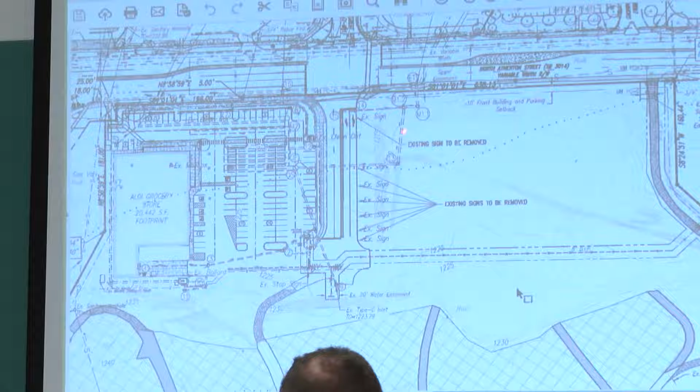There was a master plan done at that time that was approved, including 3,000 square foot retail buildings anticipated to be more than likely restaurants, and a 16,000 square foot two-story building anticipated to be an office bank building. That was the master plan.

So if we jump to the next sheet, you can see the proposed project here. The bank we are proposing would be this building right here—it's 14,800-some square feet, 5,000 square feet on the bottom and 9,000 on the top. That's because the footprint of the building is here, but the second floor would be over top of the proposed drive-through lanes, as most banks have. As you can see, the site would have 54 parking stalls installed with this phase.

I say this phase because we are showing future buildings anticipated here and here. Those are not slated for construction at this time. They're shifted around a little bit from the master plan, and we wanted to represent what this whole thing in its entirety would look like.

The development would also include a retaining wall around the perimeter of the site, similar to the first phase where Aldi's is—a two-tiered wall with landscaping between the levels and uplighting. The sidewalk would connect the interior of the site down to Atherton Street, going around this area. There would also be a set of steps coming down from this commercial area, similar to the other side—same wall construction, amenities, and plants around the perimeter, with a tension wire guide rail system for cars and people around the top.

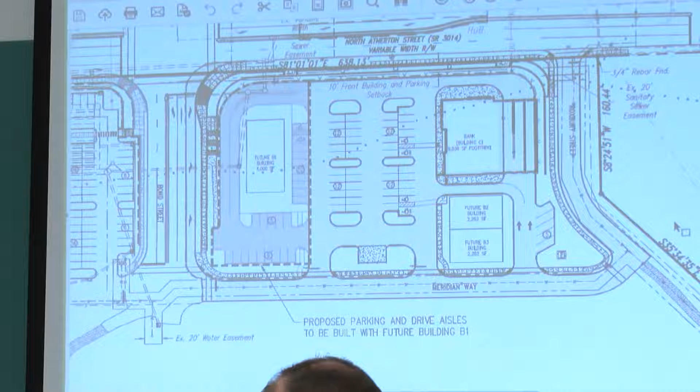Part of this development would also include some roadway improvements. The traffic impact study done for the site indicated the need for a right turn lane on Atherton Street to Woody Crest, right here. An HOP has been submitted to PennDOT for that; it's being reviewed, with one or two minor things we're working through. We're working with the property owners on the easements—that agreement has been reviewed and generally accepted, so that would be the last step for that HOP to be put in place.

That HOP also includes a lengthening of the left turn lane on Atherton Street into the site and the addition of one more lane right here. Those improvements are based on the full build out of this site, so those numbers used for the traffic impact study were based on the master plan you had seen 2 years ago for the entire site. That's the anticipation - there shouldn't be any more improvements on Atherton for this project.

Now the site also includes a right in, right out, which would be this road right here. These are all internal streets. There's a connector street right here, so there would be a loop around this entire section of the project. So access - this would be right in, right out, this would be full intersection with improved lighting timing system.

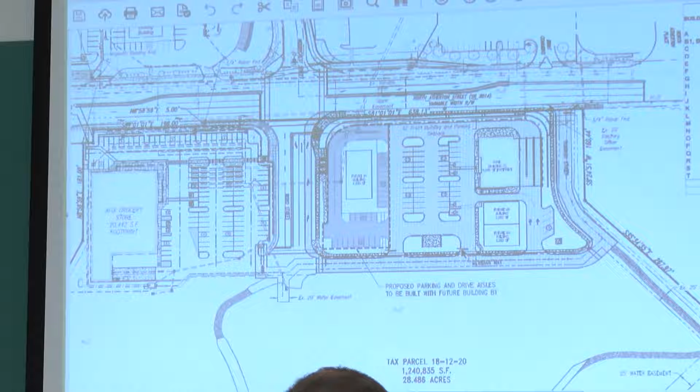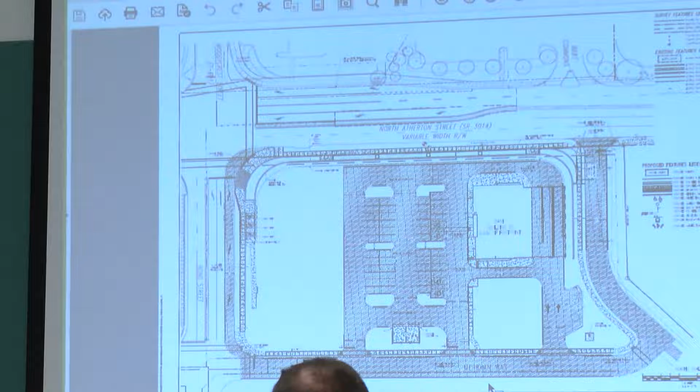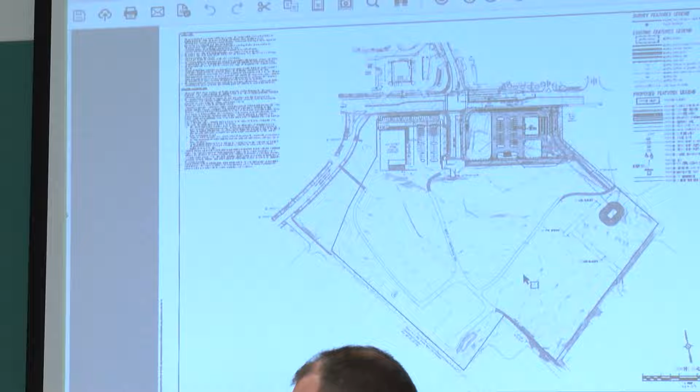Looking back at the overall site, there is a stormwater basin. It's kind of way back here in the low corner of the site. It's designed for stormwater to get collected on the site, it gets back here, and then everything leaves the site through this pipe under Atherton Street - it goes back there and is managed, and then comes back out. When this project evolves and gets bigger, more of this whole area will be a detention basin, so that little hole you see is the start of what's going to be the rest of that site.

The site includes lighting on the site. We have an area for refuse and recycling pickup - it's centralized, one location. The anticipation is everybody would use that one spot, the bank, in the future development, so trucks come in, pick up and get out pretty quickly. As far as other utilities, sanitary leaves the site on Atherton Street, tying in here. Water comes through the site at that same location, fairly innocuous to this project.

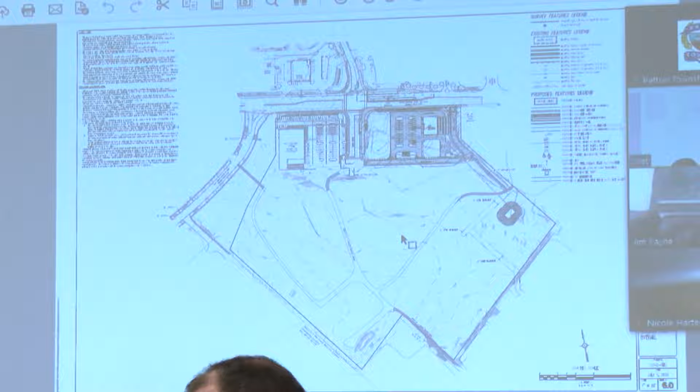So the bank itself will have 3 drive-through lanes. It will have an ATM - I believe the ATM is on this lane here, and then a drawer and pneumatic service to these 2 lanes right here. Like I said, it will be a 2-story building.

Let me show the rendering, Alex. We do have a picture of what it's anticipated to look like. Can I interrupt before you go there? Sure, 2 quick questions.

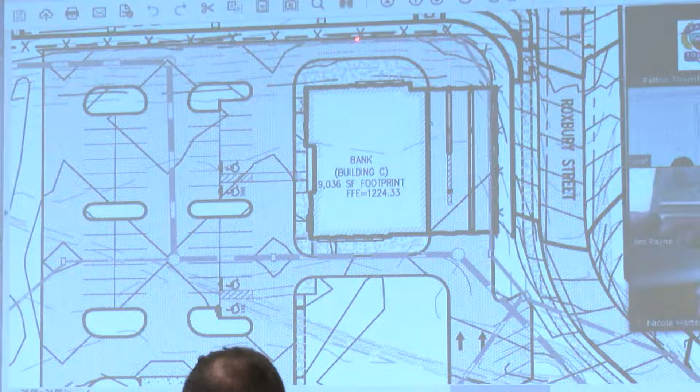So the drive-through traffic will then, once you go through the drive-through, right there, okay, straight out. It'll loop around and can come straight out - there's an exit right here.

And then what about pedestrian traffic from that area - let's say we want to head in the direction of campus, how does one do that? So if you're in the bank, you can sidewalk to here and out. You can sidewalk to here and either down the steps or down the sidewalk. Both of these sidewalks are ADA compliant, the roads are ADA compliant, or you could use the steps. So this gets you to - you do have to loop around here. This corner is about 6 or 7 feet high, so there's no connection directly from here to this corner. You do have to loop around the bank.

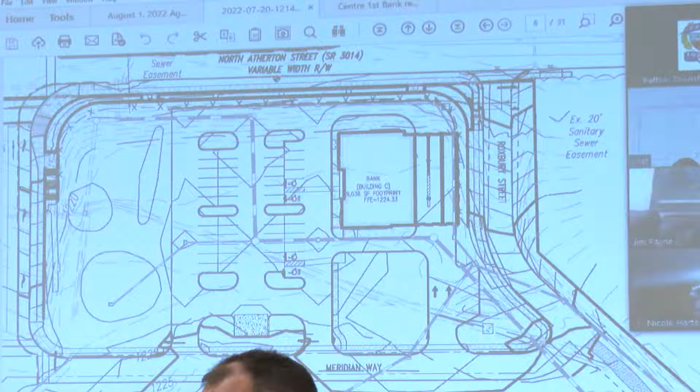Yeah, okay Brian, thank you.

So here's a rendering of the bank, this is what it's anticipated to look like - a lot of glass in the front, 2 stories, with a mixture of stone and/or brick and metal. They liked the look of this building, so they moved it forward. They thought the presence on the site would be good, this would be a good first building for this phase.

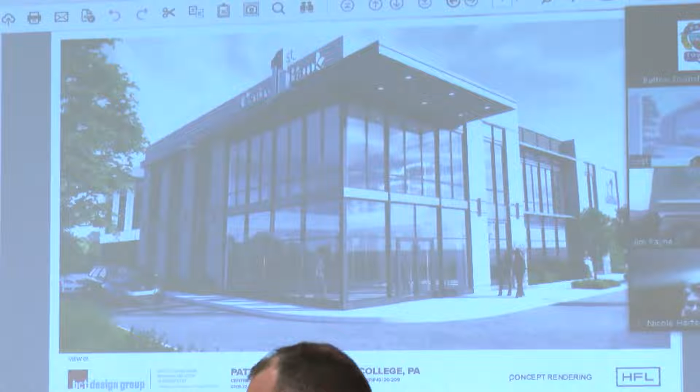We're showing the signage up there. We understand the signage will have to be permitted appropriately - I'll call that a wish sign, we haven't gotten to that part yet, so I'll let you know. Yeah, it's not permitted, but that looks good, that's what they want to see there. So we understand that.

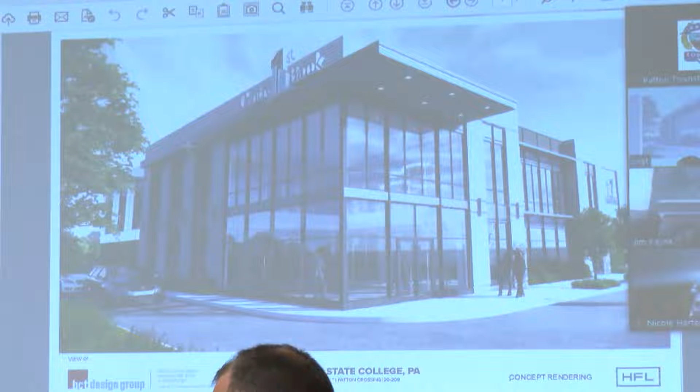I think there are a couple outstanding items yet. There was a question on location of some fire hydrants - we can certainly work through that. There was also a question on the bike path that currently connects from Park Forest Avenue and loops down here. Our intention at this point would be to tie it into this street to continue that connection to Atherton Street. That bike path will evolve as the site develops - the master plan had shown where it starts and ends. I'm sure as we go forward we can talk about the development and the connection to Atherton Street. I don't know, is there anything else we needed to talk about, Alex?

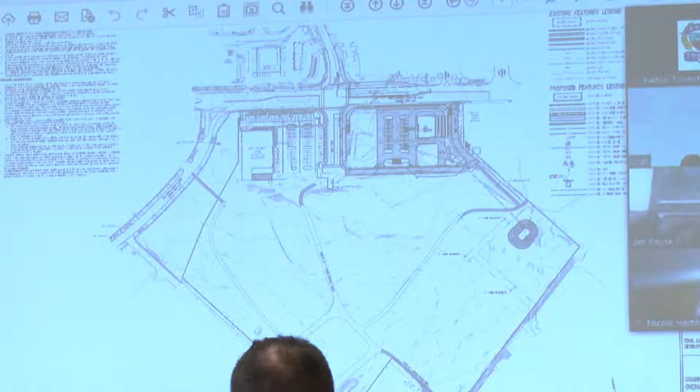Just a question - where was the area where people go to use their cards to get into the bank? Was that on the back side, on that first row? I believe the ATM was in this location right here.

So then people walk all the way around to get back to their car? No, it's a drive-through. Oh, it's a drive-through - so these lanes here are to use the ATM? These are drive-through lanes, it will be a drive-through ATM.

Yes, and my understanding is that the location of those ATMs now, they're really pushing to get them in the building, as opposed to putting it out here away from the building. Keeping the machine itself in the building is a big security thing.

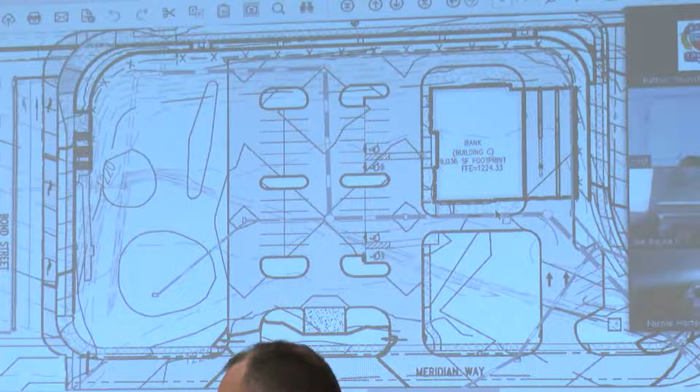And those traffic improvements that have been submitted to PennDOT, those would happen before the entire Phase 2 would be completed, correct? That's correct. Okay, thank you.

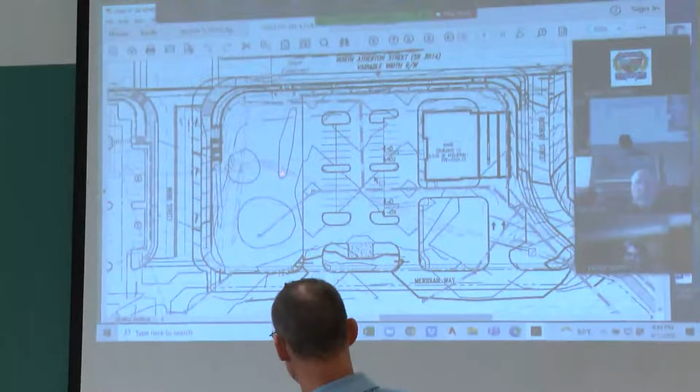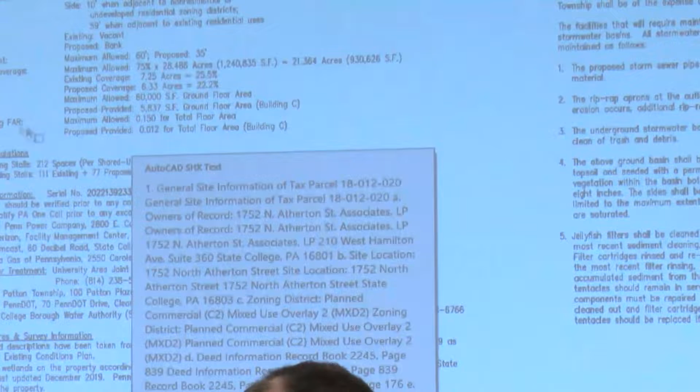Can we talk about the parking that you and I talked about earlier today? So the plan that we had submitted, our intention was to show an overall anticipated build-out for this area, which included this building and this building here, which showed a parking shortfall of 30 spaces. That was only intended so everybody understood that because we moved these buildings around a little bit, we'll be coming back when those buildings come in, when we know what they are and what the areas are, and that'll be revisited.

But the required parking for the two businesses on site now, the bank and Aldi, requires I believe 136 parking spaces, and there are 188 parking spaces available with this plan. So there will actually be more spaces there, with the anticipation that the excess would be eaten up when those buildings come in. And what Alex is talking about is our plan note wasn't quite clear on that, so I wanted to clarify that, and we can certainly update the note.

Also in the agenda, it states that zoning permits will only be required for the rest of the phase, so that won't be the case - we're going to see more land development plans. Yes, so I wanted to reiterate that.

Thanks. How about bicycle parking? Any bicycle parking at Aldi's or the bank? Aldi has bicycle parking, we did show some there. We did not show any at the bank. I'm sure we could find some spot for bicycle parking there. Yes, we did not - we need to add that.

Now, this would not be under anything we talked about last month, because this was approved already, so any future adjustments we make for bike parking discussed last month would not pertain to this instance, correct? Correct, it's actually not even approved by the Board of Supervisors yet. So even if it would be approved, it would not pertain to this because this was approved well before we began this discussion.

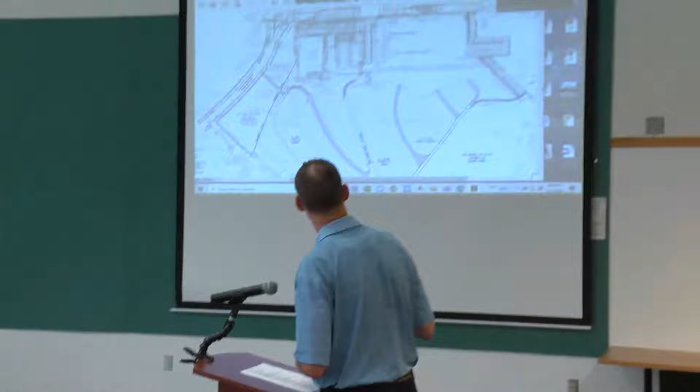Starting where I have my cursor, that's where the road, Roxbury Lane, will be built, right here. So the bicycle path will terminate there, and then it'll just be a roadway. And there's nothing we can do to provide for cycling safety at that point? I guess it seems kind of scary. There's nothing really to connect to at Atherton Street, that's the problem.

That eventually, when we were talking about this with the master plan way back when, the property manager was talking about developing that parcel more or less simultaneously with this, and we were going to have a vehicle connection at that point between the two properties, so we were going to extend the bicycle path into there with the hopes that would get people over to Martin Street, which is a much better place to put bicycles than on Atherton Street. So until the Temple property develops, we won't really have a firm place to send bicycles to.

But for now, since we're sending them to Atherton now, we'll just continue that with a share-the-road type of connection.

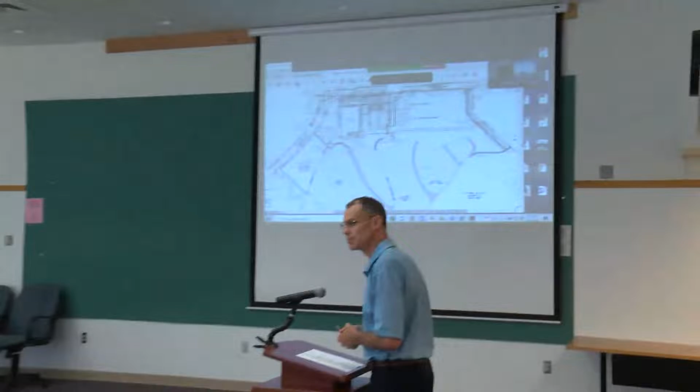So have you seen the sharrows on Devonshire? Something like that.

But then if common sense were to prevail, it looks like when this development gets built out, the more natural bike path would be kind of towards the rear, connecting towards the Martin Street direction. So the bike path goes to the Temple property, and then there was also a reservation of an easement to connect to the property which is now Park Forest Apartments, across off the back there. So if that can be worked out, it's up to the adjoining property owner.

We want to see pedestrian and bicycle traffic through the Temple property also, again moving them down towards Martin Street and Aaron.

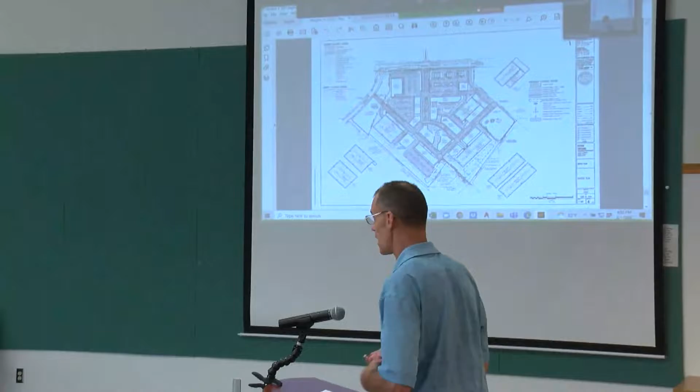So currently, the on-street bicycle plan, and by on-street I'm talking about the additional 4 feet on either side for a bike lane, goes from Park Forest Avenue to the Temple property through the site. But it also includes an easement across the property that connects this path to the property of Park Forest Apartments, so you could go this way or this way, whatever route would come first.

I wonder too if that'll naturally become a path. I'm told people use it now. There are people on the site now, so.

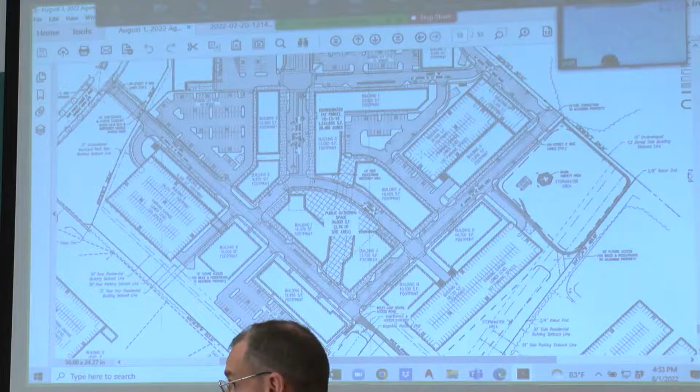And that motion includes putting bicycle parking in, am I correct? Yes, it's required.

Okay, do we have a second? I will second. Thank you, Rich. All in favor, please say aye. Aye. Aye. Any nays? So moved. Thank you.

Number 5, status report on pending items. I guess, Alex, is that you? The only thing I want to report on is the bicycle parking regulations. We're going to have a public hearing on September 14th at the Board of Supervisors meeting to discuss that and move it forward.